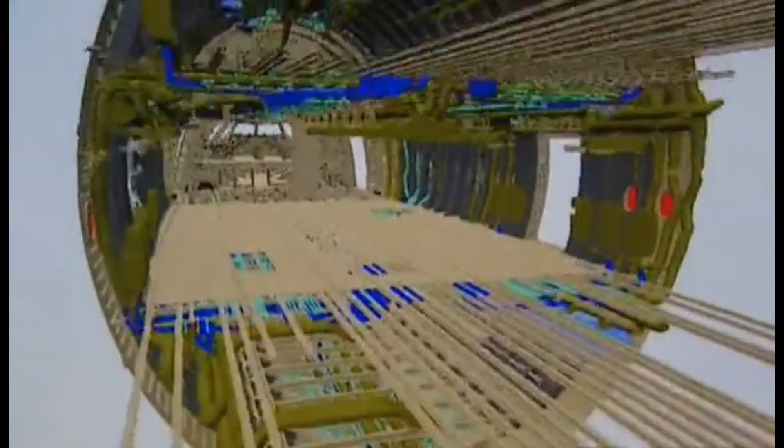European plane maker Airbus is staking everything on a machine that they hope will replace the big Boeing and dominate the market for years to come. By any standards, taking on the 747 is a massive gamble. If they succeed, they'll make a fortune. If they fail, billions will have been thrown away.

This aircraft cannot be a failure. When you invest $10.7 billion on building what we're pronouncing to be the flagship of the 21st century, you can't fail. There isn't a 'well, we almost got there' or 'it's so-so, not too shabby.' No, either it's going to be that flagship of the 21st century, or it's going to be a disaster.

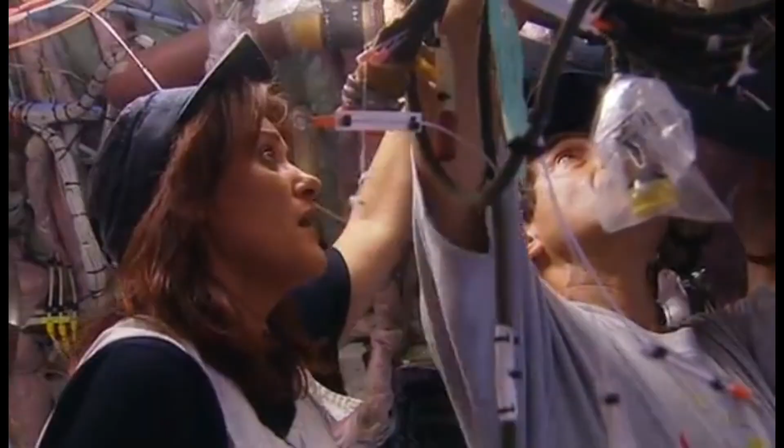Since 2003, Channel 4 have had exclusive inside access to this huge project. From the senior management fighting deadlines and budgets - the people are exhausted already, they are under the highest pressure you can imagine - to the men and women actually building the plane. These moments really piss me off.

It's a tale of the struggle to manufacture giant components all over Europe, and then to ship them to France for final assembly. We are crazy. It's a mammoth high-technology engineering challenge. The race to build, test, and fly the brand new machine.

In charge of it all is 48-year-old Charles Champion, head of the entire project. He understands only too well the risks involved. Well, what is at stake, I would say, with such a program is basically the future of the company, as such. Really? Really.

Airbus was created in the 1960s, when Spain, Britain, France and Germany decided to take on the might of the American aviation industry. Their first aircraft took off in 1972, and nowadays they make over 300 planes a year. But the A380 is on a different scale altogether.

Building such an aircraft, it's a bit like climbing a mountain. You see the mountain in the distance. It looks high, but not too high. And you start walking, and you got the first level, and then you say, 'Whew, this one was hard.' And you got the next one. It's even harder. And so you see the summit. It's getting closer, but at the end of the day, there's still a lot to walk and a lot to climb.

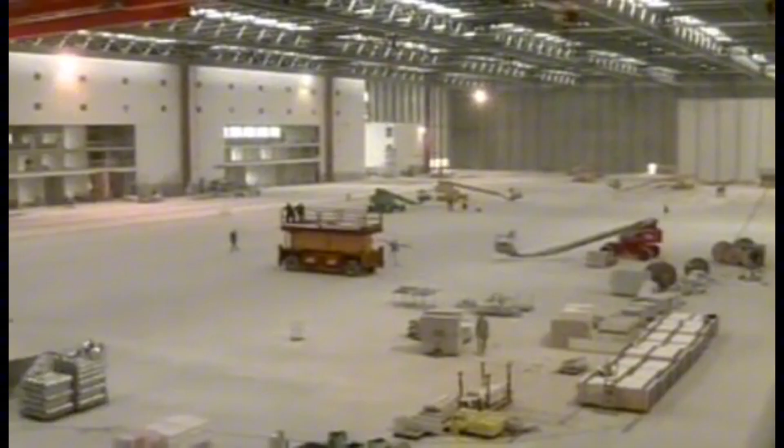December of the year 2000. Now that Airbus have a basic design for their huge new plane, they can start building it, or rather the buildings that will build it. The aircraft is so big that new factories are needed for almost every major component. On top of that, Airbus always share the work between its 4 founding countries, so a major international construction project is required.

The A380 will be built from a giant kit of parts made mainly in Spain, France, the UK and Germany. Each country has had to invest heavily in new facilities. Other parts will come from more than a dozen other countries, so the plane is truly a global effort.

It's big, it's really big. You name it and people are working on it, so at the end of the day it's almost impossible to count the number of people working on this project.

The biggest single development is near Airbus headquarters in Toulouse. The final assembly line is where the various components of the plane will be joined together.

Work began in 2001 on a complex that would cost £240 million on its own. A third of a mile long, it covers 24 acres, big enough to hold 8 planes at once. The huge cost of this programme means Airbus have to sell 250 planes just to break even.

To help the drive for early sales is a nearby showroom. Inside is a full-size demonstrator of the new machine. Getting customers to spend a lot of money on a plane that has yet to fly is quite a challenge.

But Chief Commercial Officer John Leahy is full of confidence. Why would you want to spend $265 million for something like this? Because it'll do something no other airplane in the world can do. And that's bring people 8,000 nautical miles in a level of comfort that's never been provided before.

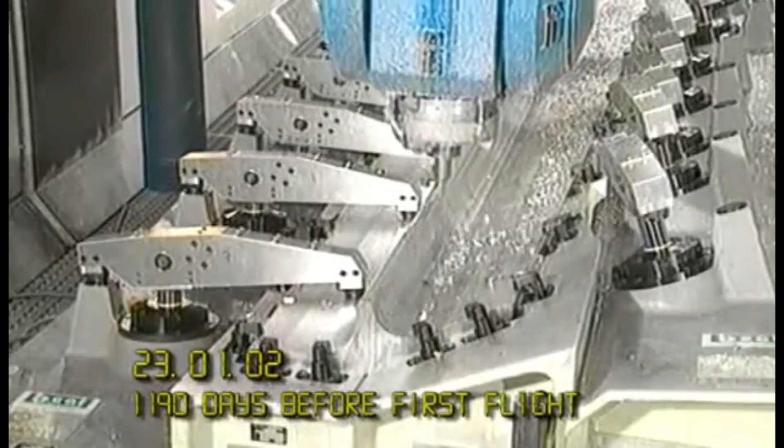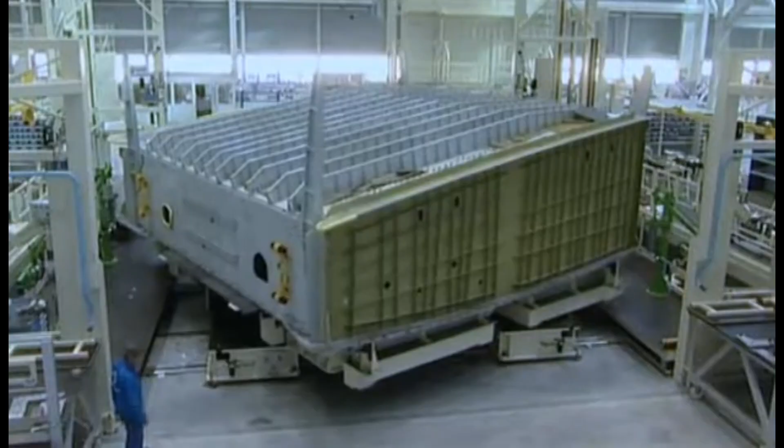The first piece of metal is cut in January 2002, and shortly afterwards, huge components are being produced in brand new factories all over Europe. In Germany, large sections of the fuselage rapidly take shape, put together using high-tech materials and thousands of rivets. In France, the carbon fibre centre wing box, the structural heart of the aircraft, comes together. In the UK, in Broughton, North Wales, the wings themselves are assembled. Built up from hundreds of components, each one is constructed standing on its rear edge. It looks more like the hull of a ship than part of a plane.

By November 2003, the first wing is ready to be hoisted out of its supporting jig, and engineer Simon Shingler and his team will get their first sight of the giant part.

The whole idea of having you all here is to make sure that you're all concentrating on your one specific station, right? That's how we're going to ensure that we take this wing out without anyone hurting themselves or without the components getting damaged. When we're lifting this wing out, make sure all the mobile phones are turned off.

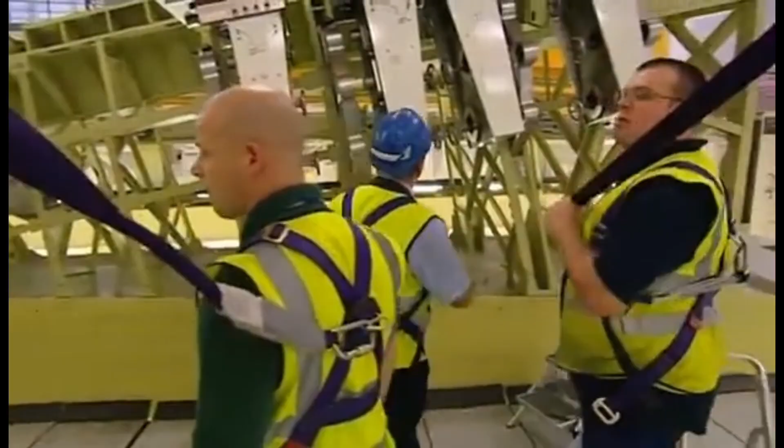Despite the laughter, this is a serious business. The wing weighs over 30 tons, and to damage it now would be disastrous. Everybody gets very excited, and it's easy to leave one of the attachments in place or part of the tooling, because there are so many attachments around the periphery of the wing. If that happens, it causes damage when it's being lifted.

Alan Ferguson is in charge of the first stage, attaching the hoist to the solid titanium lifting points. What we're doing is making sure we get the crane correctly aligned with the lifting attachment, so that when we make the initial lift, we don't get any sway on the wing. So it's critical, yeah.

That's going to be twisted back on like...

Right, we're ready to go. We want everyone in place now, and then we're going for it completely. Right, gather round please, gents. The operations team and the crane driver are going to take some weight. We're going to release the front spar, and then we're going to remove the wing. Try to stay calm, don't panic. We'll do everything nice and slowly, there's no rush now, but once we start, we're not stopping. Thanks very much. Okay. Right.

Steady now. Okay. All right, you're clear, take it off. Right, get that spar support out, please. Is it down? Right. With one small movement, the wing is free. Clear, I think the wingtip's clear. Yeah.

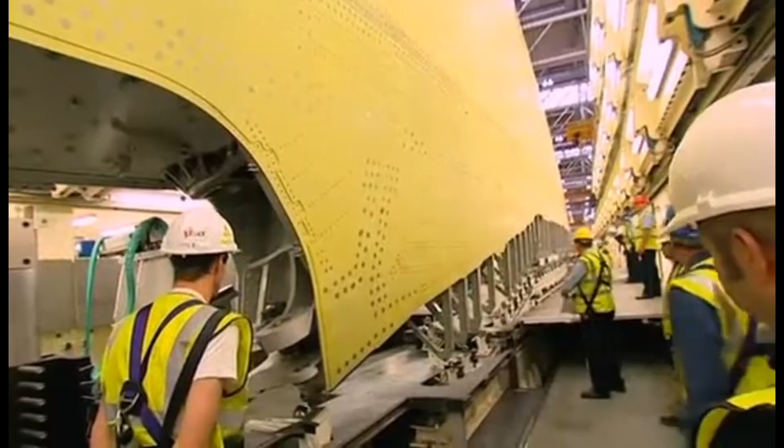Now it can be lifted out and into the next hall. Don't forget the outboard end. The wing may look big now, but once the rest of the parts are fitted, it will grow by half as much again.

The true size of the A380 is starting to show. I think the whole world's going to look on in awe the day it flies. I think the Boeing Aircraft Company have got something to be very wary of.

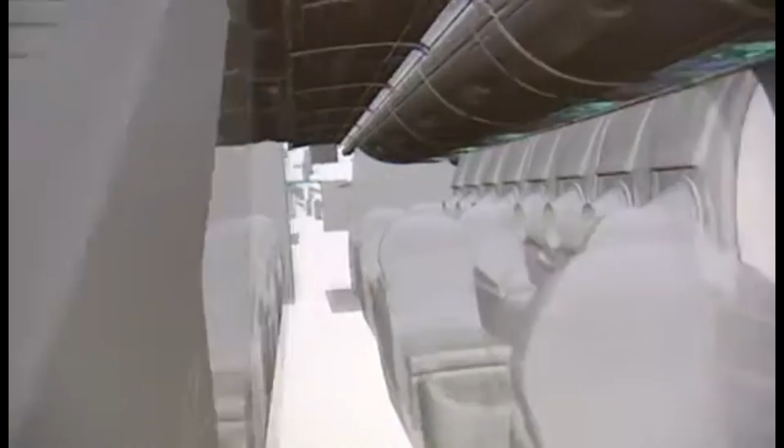But even while the major components are being built, detailed design of the interior and many other parts is far from finished. Charles Champion and his team of senior executives meet once a fortnight in Toulouse to try and keep the project on course.

With so much happening at once, there is a real danger of becoming overloaded. Can we start? It's a question of time management, not only at work, but also time management with your personal life. And you can burn out. Basically, if you're not careful, you just can burn out, and at the end of the day, you're out.

Andreas Fähring has been brought in to replace the previous head of interior engineering. For him, it's particularly tough because he's taking over a department that is already 3 months behind schedule and over budget. Team and myself, we are under enormous pressure because we have to keep the timeline and we are late. We have to keep the budget line and we have major difficulties to do so.

Even at this stage, Andreas and his staff are suffering from the punishing schedule. People are exhausted already. And sometimes they are a little bit overstressed, and the reaction is overstressed as well. Because if you then have a very quick requirement coming in, you have to speed up, and so on. They do not understand, because they are working like hell already.

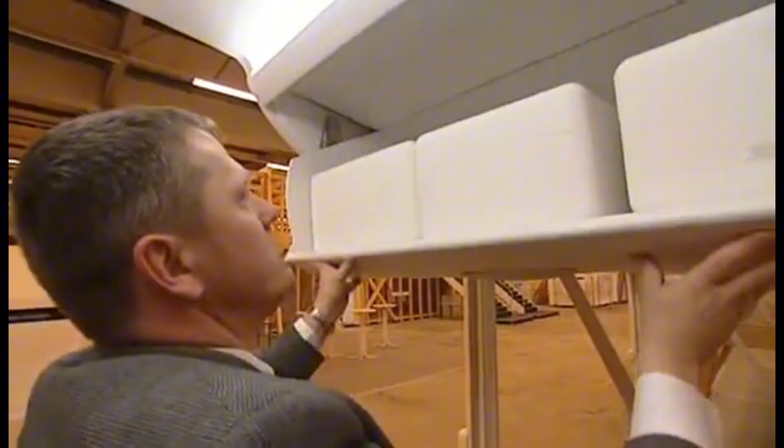Even engineering something as simple as the overhead lockers is a challenge, which is manually operated. The loading limitation of these bins are 50 kilos or 60 kilos. So you can imagine that if you have a stewardess or a passenger trying to move 50 kilos like this, they are not that strong, and it is a difficulty.

Although the cabin doesn't need to be finished for the first flight, building and testing it is a process that will take several years. Even now, if the early customers are to get their planes on time, the team have their work cut out.

What is really needed is time. Time.

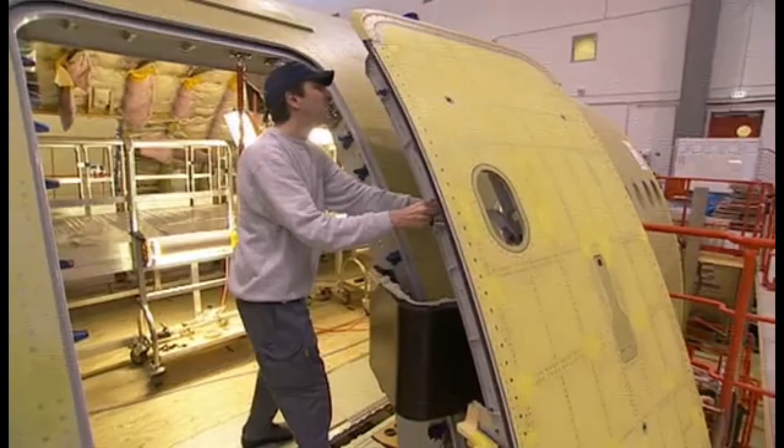By March 2004, the first set of wings are nearing completion in Broughton. The fuselage parts are almost ready to leave northern France and Germany for the final assembly line in Toulouse, where everything will be joined together.

Carrying such large objects thousands of miles is a major task in itself and requires one of the most complicated and expensive transportation systems ever devised. The parts will travel by road, river and the sea in a logistical dance that has to fit together perfectly and work first time.

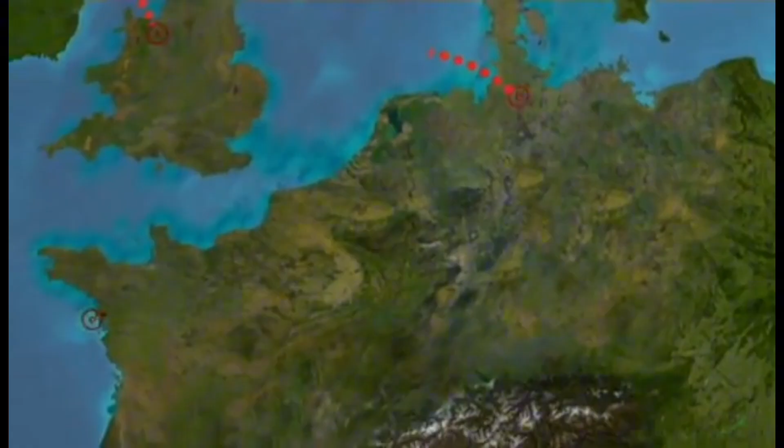The fuselage, wings and tailplanes will be carried by ship from the factories in Germany, Britain, France and Spain, converging on the port of Pauillac near Bordeaux on the west coast of France. From there they'll be loaded onto barges that will carry them 59 miles up the River Garonne.

But still the journey isn't over. A fleet of lorries will haul the parts by road the last 152 miles to the brand new factory in Toulouse.

It's a highly complex scheme that's never been attempted before, and it starts in Hamburg on the 24th of March 2004 as the first finished fuselage sections of the giant airliner emerge into the light of day.

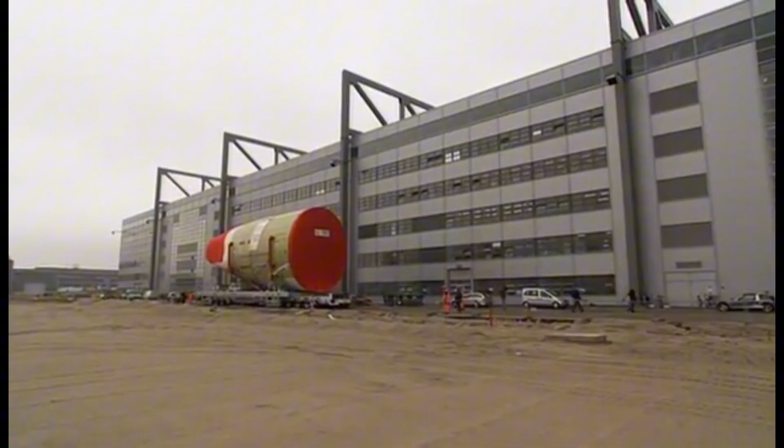The parts are carried on purpose-built radio-controlled, self-powered low loaders. Each one has 96 wheels and can travel at a maximum speed of 6 miles per hour. The factory is just a few hundred yards from the purpose-built dock where the cargo ship waits.

Now begins a 970-mile voyage through some of the busiest shipping lanes in the world to the west coast of France. Thankfully, the weather is perfect.

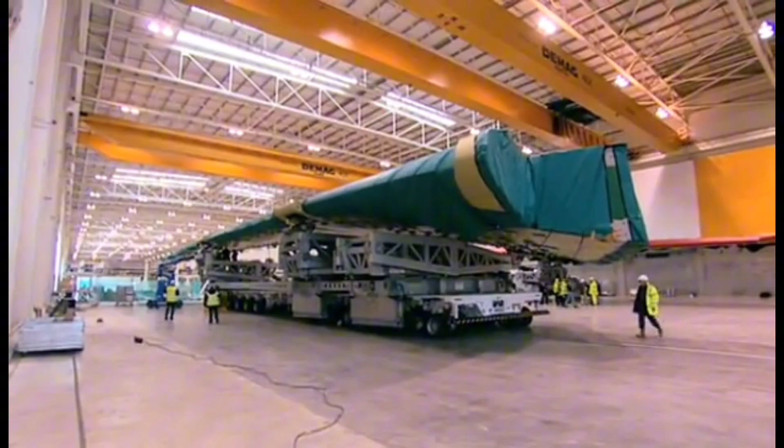In Britain, a few days later, the wings begin their journey. For the UK team, it's a significant day. After the last 2 months of preparation, the previous 2 years of planning, we've actually got the moment now when the wing's going. So it's an exciting time, and it's what people here have looked for many, many months.

Stage 1 of this 1,000-mile trip is to use another low loader to carry the wing a mile from the factory to the nearby River Dee, where a barge is waiting. On the way is a narrow bridge, and there'll be just inches to spare.

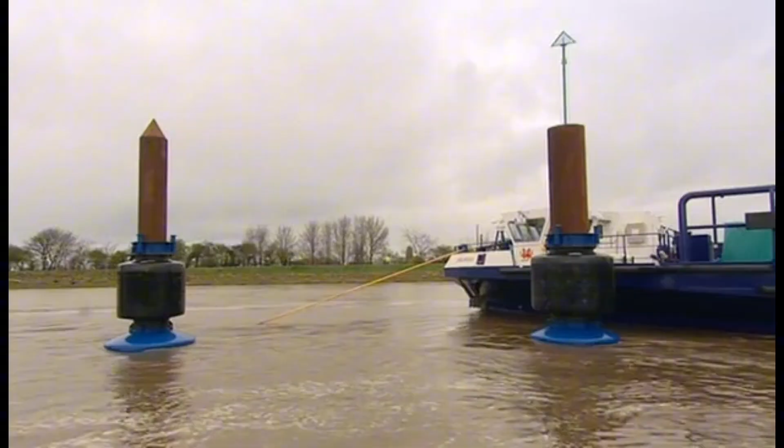At this time of the month, the current is running dangerously fast. They haven't picked the right time for us because the tide is making probably about 5 knots, and we've got to compete with that later on. So not the best time of year, not the best tide for the first time it's been done, but I'm sure we'll manage it. We'll have to.

The wing is gently manoeuvred onto the barge and the low loader carefully retracted. It's time to put all the theory into practice.

The crew are constantly monitoring the clearance under the bridge, but as they approach, they realise the strong wind is holding the tide back.

They might hit the bridge too soon, so Graham holds off for a few more seconds. Yeah, there it is. Okay. Just hope it's taller than they say it is. Look now. Hey, I tell you what, that is nice, that is beautiful. Isn't that beautiful? Exactly 50 centimetres. Exactly.

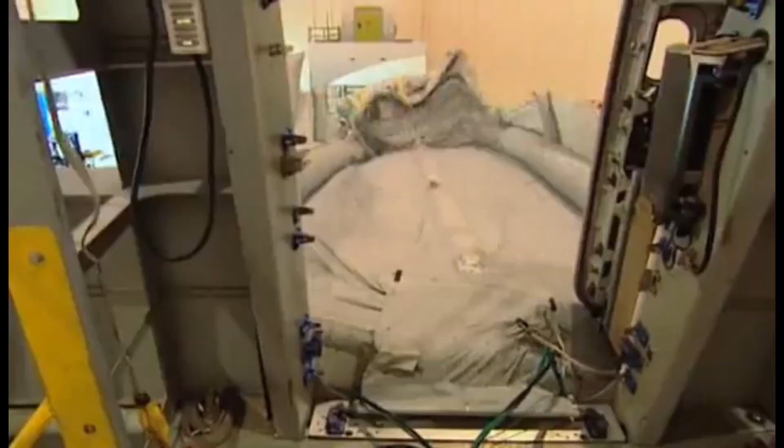Each slide is designed on computer, and this is one of the most complex on the whole plane, the over-wing slide. Today it will be tested for real, a critical time for the engineers. This is a brand new slide, fresh out of our prototype department. It's never been deployed, it's never been slid on, and the pressure is on.

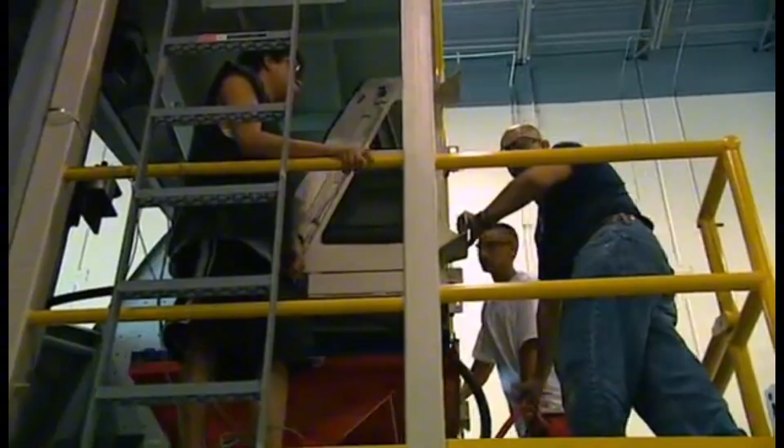The slide fits in a small pack, which is mounted to a full-size mock-up of the plane. It allows passengers to get from a door, across the wing, to the ground, deploying almost as if by magic. 3, 2, 1!

The regulations say that 850 passengers must be able to get out of the A380 in just 90 seconds, and the only way to prove the slide is up to the job is to use real human beings. 40 people will take part in the test, and the first step is to get everybody warmed up.

Everybody does it! Let's go! Let's do it! Come on!

Ted Oney, who'll be running the test, is wearing a rather special shirt. This is my lucky Hawaiian shirt, of course. Every time I want to run an evac, I wear this shirt, so when people in the plant see me in this shirt, they know we're running an evacuation test.

The aim of the test is to show the slide can hold up to the weight of the evacuees and allow a safe but speedy exit in an emergency. Our slide will have to have 40 people traverse down the slide in less than 17 seconds. That meets our specified rate. So in the grand scheme of things, we'll be able to say that we could evacuate the entire airplane within 90 seconds.

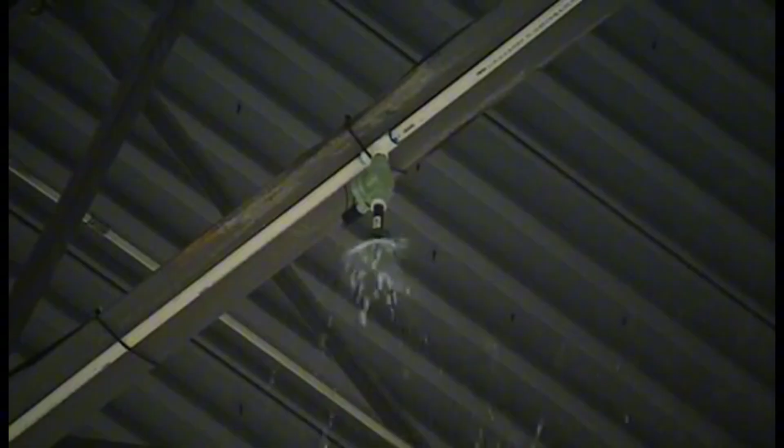As the water puddles on the floor at the toe end of the slide here, it means the landing surface is slick. People are used to landing normally, and suddenly it's much more slippery, and if we don't do our job right, we get a pile of bodies at the bottom.

Go, go, go, go, go, go, go, go, go! Get out, get out, get out, get out, get out, get out, go, go, go, go, go, go, go, go, go, go, go, go!

Come on, come on, come on, come on! Yeah! All right! All right, yeah! All right, have a seat, have a seat. Great job, everybody, great job! I'm not doing that no more. No way, I quit.

Excellent, excellent evacuation, I'm very pleased. Yes, I'm happy with that. There wasn't a lot of bumping. The slide did well. One slide tested, just 15 more to go.

By the 7th of April 2004, thanks to careful planning and good weather, 3 huge pieces of fuselage are nearly at the factory where they'll be joined together. All the components made it safely to Pauillac, up the River Garonne and past the city of Bordeaux.

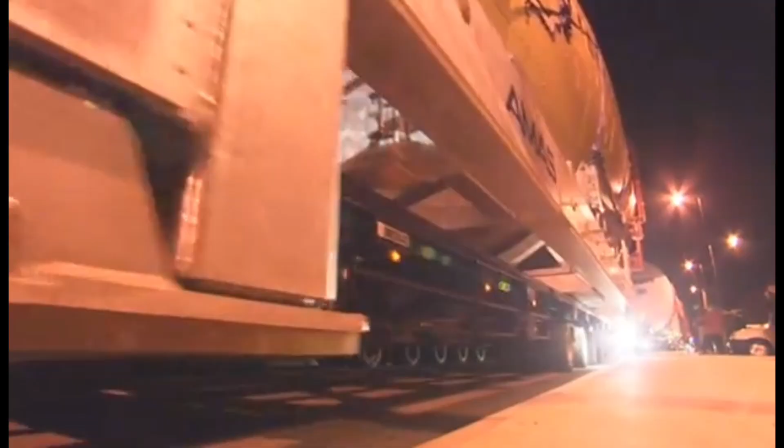This is no one-off event. When the plane hits full production, these convoys will be passing through once a week.

With Levignac successfully navigated, the last 11 miles are relatively easy. At last, after travelling by ship, barge and lorry, the lights of the final assembly line are in sight. Although it's nearly 3 o'clock in the morning, there are several hundred people waiting outside the massive new factory. Among them is Charles Champion, here to witness a significant step forward.

The delivery papers are signed, and now Charles and his team are ready to tackle the next phase of this enormous project.

For some people it's like a relief because they've delivered the final assembly line, they've done the factory, they've demonstrated the transport system. But for us guys, we are looking at the next steps: integration, first flight, then flight test phase, and then deliveries to the customers.

The work has only just begun.

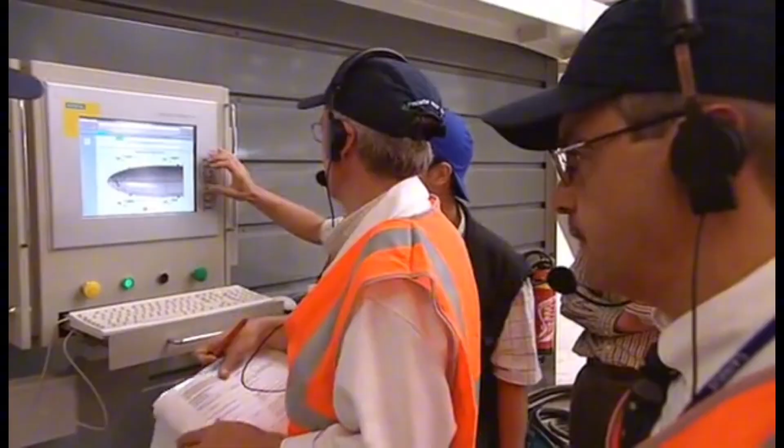Ensuring that the 3 body sections of this 73-metre giant are brought together in a perfectly straight line requires massive tools, the latest technology, and lots of patience. I feel very confident now, even if it's difficult, because we have put in place very accurate systems.

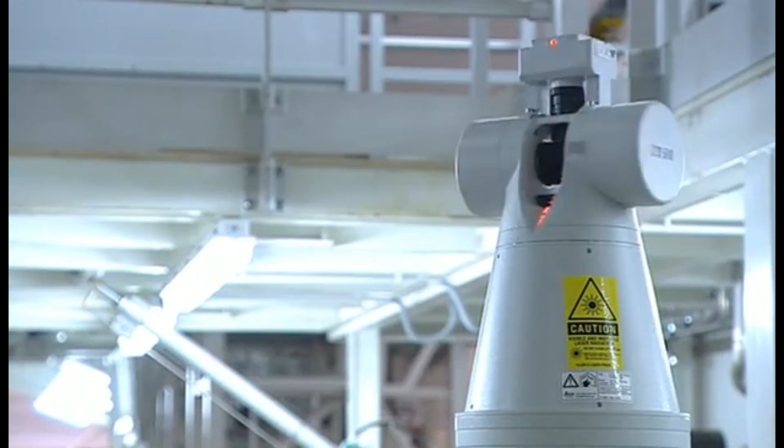The key to success lies in the use of lasers. Invisible beams scan the sections of the fuselage, and the light is reflected by mirrors mounted on the approaching components. From these reflections, a computer can work out the exact relative positions of the parts, ensuring perfect alignment.

Once positioned, the fuselage shells are brought together very, very slowly. Each turn on the dial brings the massive parts a millimetre closer together.

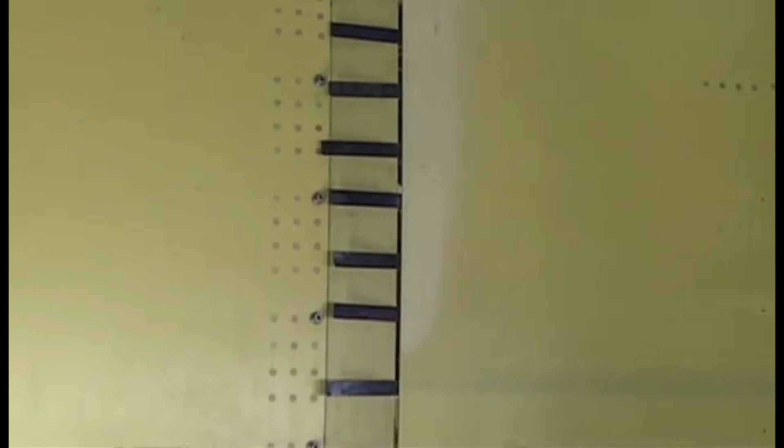On the left, a part made in Germany. On the right, one made in France. The last stage of their 1,200-mile journey. The clearance is so tight, metal shoehorns are needed to ease one shell over the other. But it's a perfect fit, the final joining together of an elaborate European jigsaw puzzle.

Soon the sales team will have a real plane to show to their customers. But the question is, will the airlines like it?

It's now the 23rd of July 2004, and for Chief Commercial Officer John Leahy, the pressure is mounting. Leahy needs 250 firm orders for the project to break even. So far, he has 139.

Today, Qantas Airways, who have ordered no less than 12 aircraft purely on the strength of Airbus's promises, are coming for a tour to see if they've spent their £1.8 billion wisely.

We're going to go out and greet them? Okay, well, where's Chris? Are they going to get about a 10-minute warning or something on the bus?

It has to go smoothly. This is one of our best customers, one of our bigger customers now for the A380 program, and we want to make sure that they're happy, that they get the answers from us that they want, and they go away with a good impression. You can imagine what would happen if they came here and said, 'Oh my heavens, the A380 isn't what we thought it would be.' In front of their entire board, that could be devastating.

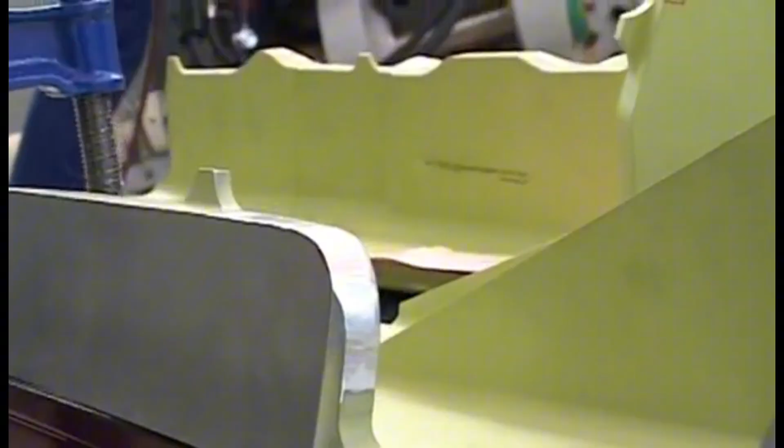Once again, accuracy is vital. The slightest error in the angle at which the wing meets the fuselage could have a drastic effect on the handling of the plane, and critically, its fuel economy. With so many sales resting on the performance of this machine, it's a job that cannot be rushed.

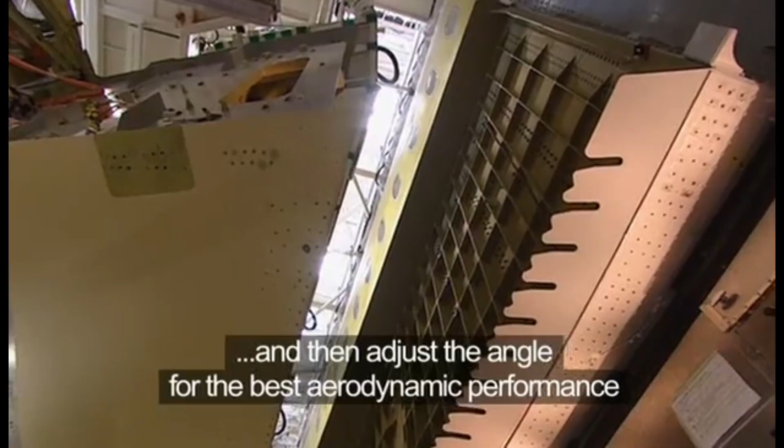Again, the laser positioning system ensures the wing is in the right place and at the right angle. But after a whole day of careful work, another small problem appears.

Some large bolts have been left attached to the wing. We must remove this one to finish the junction of the wing. A quick phone call to check that it's okay to remove them, and now the wing can be safely joined to the fuselage.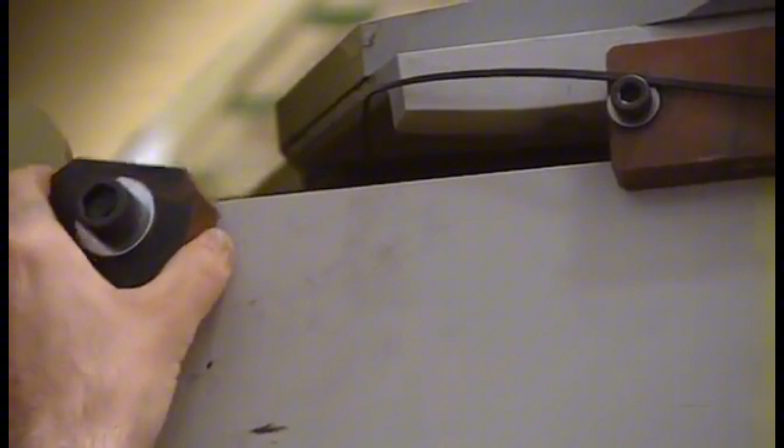A couple of miles away, at the perfectly manicured Airbus headquarters, John Leahy is conducting his guided tour for Qantas. They have arrived at the Airbus showroom, where they'll see a new, far more realistic interior.

Okay, now I think we've got just about everybody. Okay, now Rod. Though it's all smiles, this is deadly serious. If they don't like it, there'll be trouble ahead.

It's almost like a young family introducing their new baby to the relatives. You want everybody to be impressed. You want everybody to say it's beautiful. And deep down inside, you're really waiting to see what they truly do say.

The head of the airline is Geoff Dixon, a tough-talking, no-nonsense businessman. To begin with, he doesn't seem too impressed.

Notice the headroom. This is coming out about standard size.

John presses on with the walkabout, and then, almost in a whisper, Geoff reveals his true feelings. But just to give an idea of the space that you've got - it's true, and that's the way the liners are. Oh, it's fabulous. Better than we expected when we ordered, but we did expect a lot, so yeah, right up to expectations.

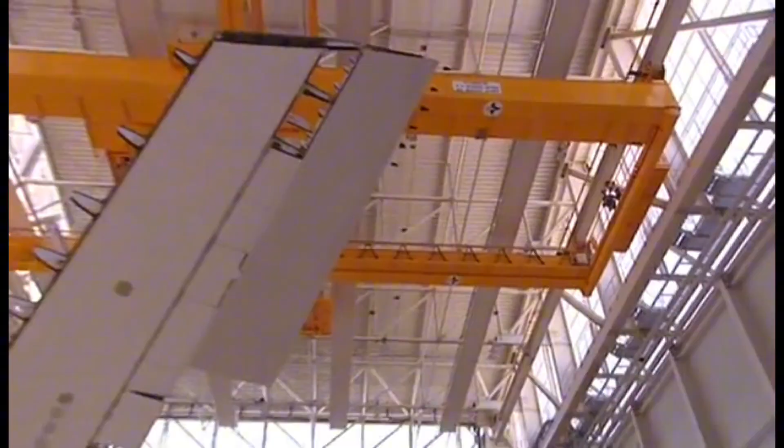By mid-June 2004, major structural assembly of the biggest airliner in history is well underway. This is the horizontal tailplane. With a span of 32 metres, it's as big as the wings of a small airliner. Made of carbon fibre in south and central Spain, it's easily the biggest tailplane ever made.

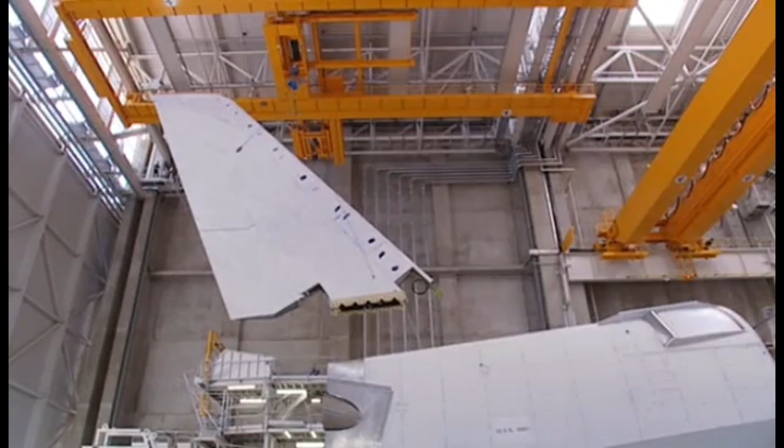The tail fin is another carbon fibre monster. 14 metres high, this component is made near Hamburg in Germany. When installed, it will stand as high as an 8-storey building. Some airports will have to buy new cranes to service it. Carefully, it's craned into place and attached with 24 titanium bolts.

As the last piece is attached, Charles Champion comes to check on the plane, and Gilles Cormier has bad news for the boss.

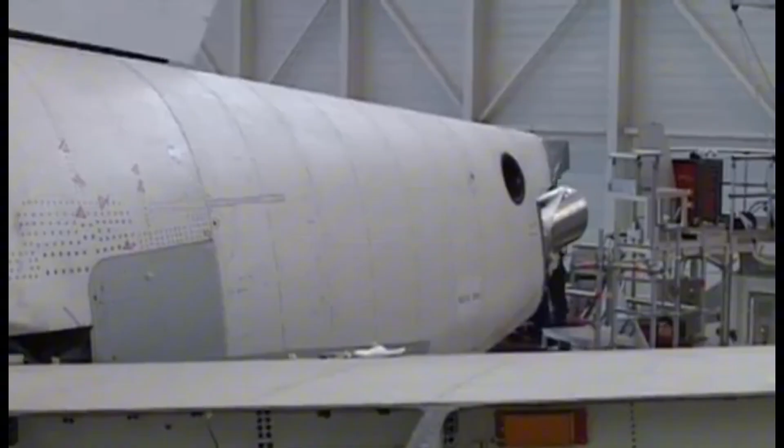6 millimetres might not seem very much, but the problem will take 3 days to sort out. Time they really don't have.

I think it's one of those phases where the success of the project is within reach, but you have many elements to tackle in parallel in order to make it happen. So you're under control, but you've got to work fast on several parallel subjects in order to be able to deliver the project at the end.

The next stage is to install the landing gear. These substantial parts have to be extremely strong. Not only is the A380 the heaviest passenger plane ever built, its landing gear must be able to cope with extreme situations.

Many landing gear engineers have a copy of this low-resolution video clip as a reminder of the conditions that can occur. Heading for the now disused Kai Tak Airport in Hong Kong is a Boeing 747. Approaching in a crosswind, the left-hand gear is about to take the full weight of the plane as it hits the tarmac. Amazingly, this was a successful landing, and the A380 will need gear that's stronger still.

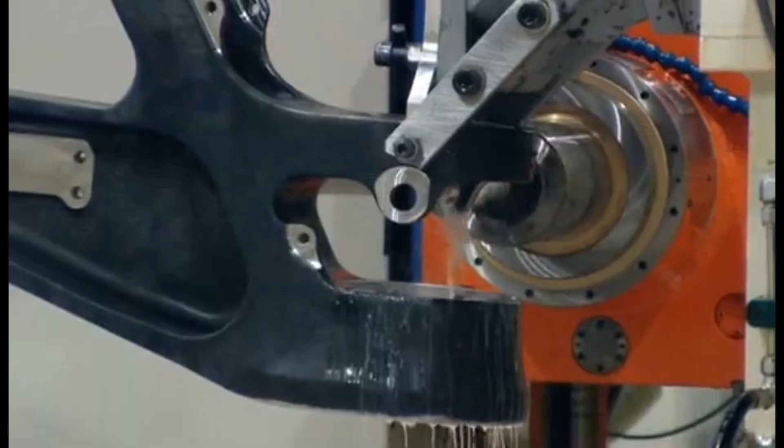The 747's gear is made by Goodrich, who are also supplying the main gear for the A380. Here, near Toronto in Canada, production is well underway, and testing is just about to begin.

When we have a new landing gear program, we have a lot of tests that we need to do: strength, performance, dynamics, durability. This one is a performance test. It's one of the first tests we do, and one of the more important tests. It's called a drop test. What it is, is a simulation of landing.

So when an A380 lands, you've got 560 tons of aircraft moving slowly towards the ground, as well as 200 miles an hour down the runway. When the aircraft hits the ground, something has got to absorb that energy. So if you jump off a chair and land, your knees have to bend and give a little bit.

Even just with the weight of a person, you're going to damage yourself if nothing gives. So that giving of your knees, your legs are absorbing energy. That's what the landing gear has to do, but instead of 180 pounds, it's got to do it for 560 tons.

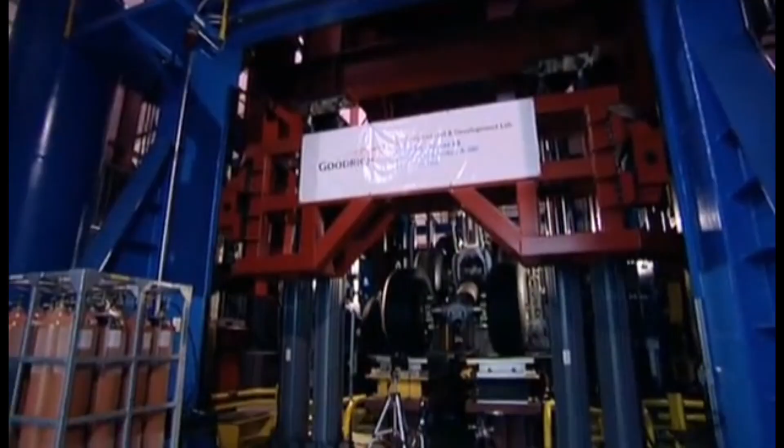Suspended inside this huge tower, the landing gear is raised in preparation for the drop. The rig is static, so to simulate the approaching ground speed, smaller wheels driven by powerful electric motors spin the big 55-inch tyres in the reverse direction.

When a switch is flicked in the control room, a hook at the top of the tower will release, allowing the gear to fall. It must absorb the same energy as a 100-mile-an-hour car crash without being damaged. It's a critical phase in the whole programme.

This could be a make or break test. If the performance of the landing gear isn't what we predicted it to be, it could impact the schedule for the first flight. So it's essential that the gear performs to how we predicted it, and from these tests, we'll be able to tell whether it does.

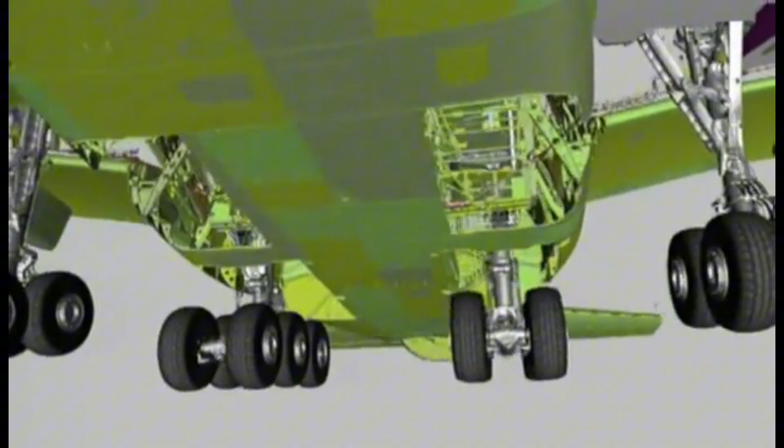Although it's huge, the size of the A380 means that this 6.5-ton component is just one part of the plane's undercarriage. In total, there will be 2 6-wheel units under the body, plus 2 4-wheel units under the wings, and a 2-wheeled set in the nose. So what you're about to see is only a fraction of the energy involved when the vast airliner touches down.

Early data shows that although there was an unwanted shudder as the wheels came to a halt, the landing gear shrugged off the huge impact with ease.

It's now only 9 months to the first test flight. In Toulouse, the tail cone has finally been fixed, and the A380 is at last ready to move to the next stage of assembly. For Gilles Cormier, it's a relief.

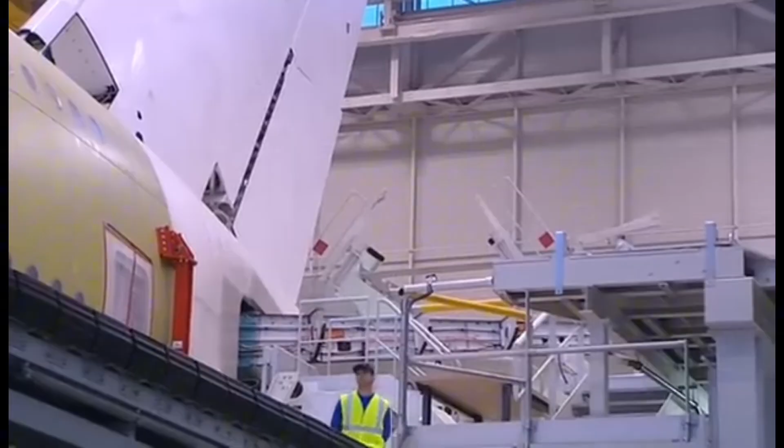The man in charge of this tricky phase is fully aware there's an awful lot of work to be done by the end of October. It's a very difficult challenge, because it's a prototype, so it's very difficult to meet our deadline.

August is fast approaching, the traditional holiday month in France when most of the country shuts down. For Airbus engineers, this year there will be no holiday. My family are very aware of this personal challenge, so everybody in the family is okay to say, okay, this year it's the aircraft year.

The plane is lifted on huge jacks, and teams of technicians begin work. The next milestone is when the aircraft will be revealed to the world, just 196 days from now. Attending will be VIPs, 5,000 guests and the world's media, with the pictures beamed by satellite all over the world.

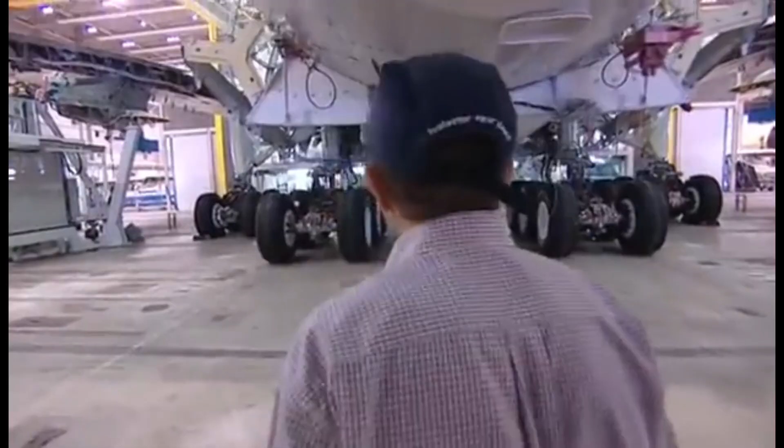But for now, one 55-year-old man has a rather special interest in the new machine. Jacques Rosay will be the first person in the world to fly the plane. Seeing it for the first time, his reaction is not exactly what you'd expect. Generally speaking, no, it's an aircraft, larger than the one we have already, but...

I think I feel very, very confident. He's confident because although the plane is still far from finished, he and his team have already spent thousands of hours flying it.

These flight simulators hold the heart and soul of the new plane, already living and already being tested. The state-of-the-art computerized flight control system means that the plane can be made to handle almost any way the development team chooses.

You don't realize that you fly such a big aircraft. You fly it like you fly a little aircraft. It's incredible. It's very, very easy to fly, like a bicycle. It's a kind of large bicycle, if you like.

The simulator is so advanced that today they are testing a scenario that is only likely to occur once in over 1,000 years of flying. 3, 2, 1, now. The wings are covered in ice, 2 of the engines have failed, and half of the flight computers have gone offline.

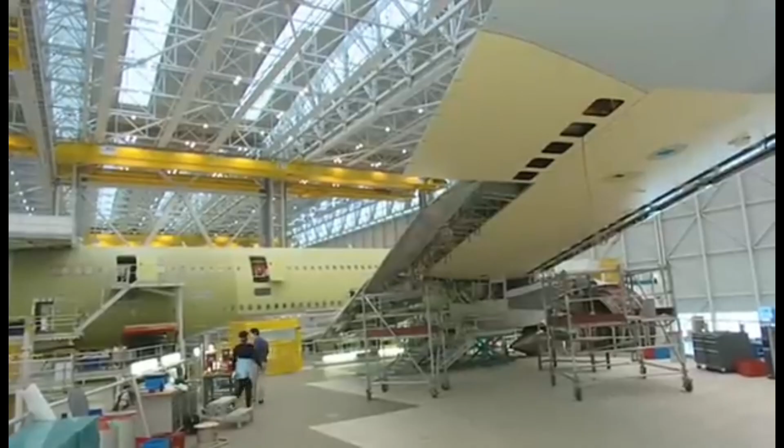Can the plane still be controlled? Piece of cake. The technology that makes the plane so safe is also extremely complex.

And when battling against a deadline, complexity eats valuable time. The schedule is slipping.

Getting the airplane out on time is critically important. There are significant penalties that we would have to pay to each customer if we delay his aircraft after a certain grace period - I don't want to say how long - but a certain grace period involved in every contract.

We can't relax. We have no right, we have no time to relax. So every hour, every minute we are there on the workshop, our main job is to receive pressure and to transmit pressure. And it's a nightmare.

The penalties for late delivery run to hundreds of thousands of pounds a week. And that pressure runs down the chain of command, all the way to the men and women building the machine. Some people could, how do you say, break down, no?

Christian Polite is the engineer in charge of the tail fin, known as the vertical tailplane or the VTP. Building this huge part has not gone smoothly, but finally it's time to install the last piece, a camera that gives the pilot a bird's eye view from the very top of the fin, some 23 meters up.

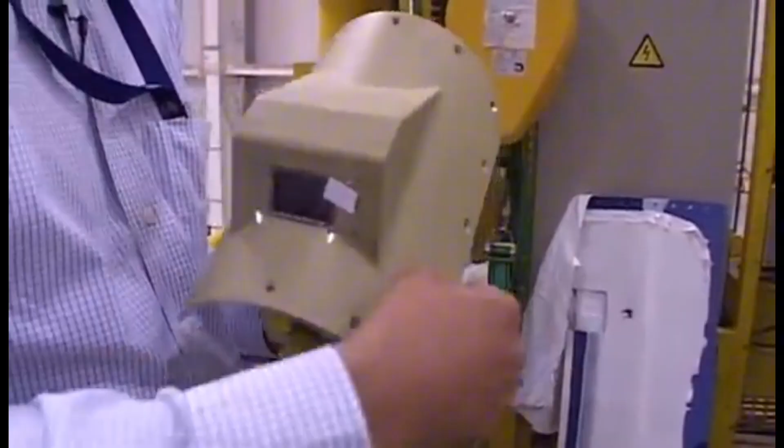Right now we're going up to almost the very top of the vertical tailplane in order to install the last component which remains on the VTP. You can easily see that this part is only screwed to the structure by, I guess, 20 screws around, and it has to be connected to the electric system via these 2 little connectors. The signals are transferred via a fiber optical cable down to a monitor in the cockpit.

Here at the Airbus factory in Stade, Germany, back in February 2004, Christian oversaw the final construction of the largest carbon fibre fin ever conceived.

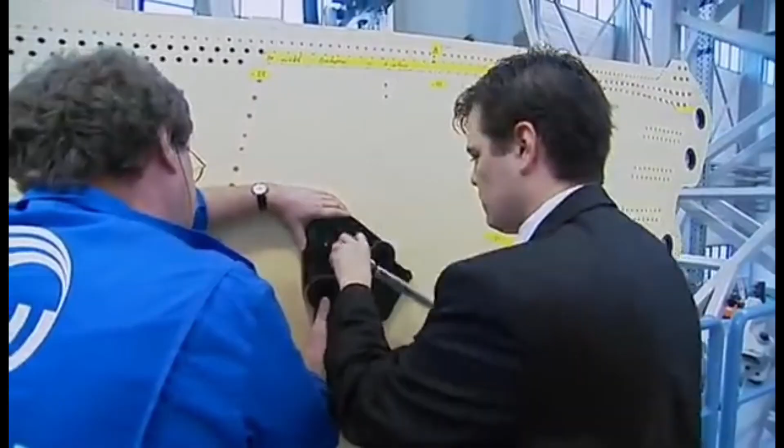The ambitious scale of the production process meant there were always going to be problems. We started with a schedule which allowed us to assemble the first fin within a reasonable time, but in fact we encountered problems which delayed the assembly, and to worsen the situation, the lead time was shortened. So we ended up with a lead time nearly half of the original lead time we planned.

The fin was delivered on time, but it wasn't completely finished. Christian has had to move to France to continue the work. We came here and thought we have a good planning, we have a good time schedule, we have everything on hand, but it wasn't like that. The moment we started working, we had to change each and every point. The planning was upside down, and so we had to start to work. That's the way you find the way through the jungle.

Now though, as the screws go in on the camera, the end is in sight. It's a good sound. That means the screw is in. With every screw we're a little step towards the end.

But then there's a problem.

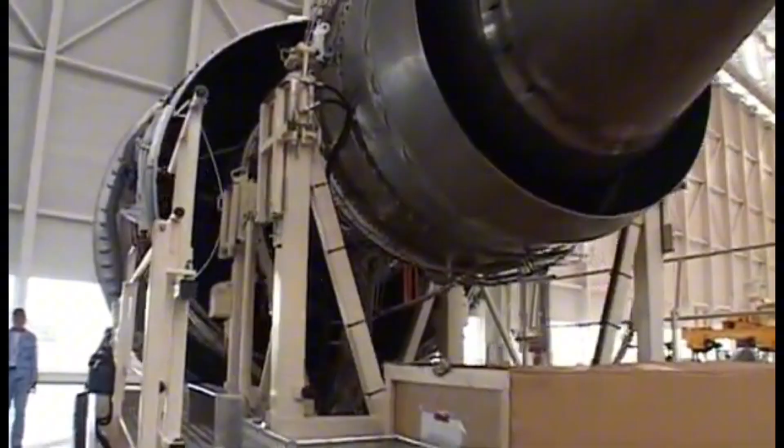Despite the setbacks, the build must continue as fast as possible. Now they can begin mounting the engines, some of the most expensive parts of the whole aircraft. Together, 4 of these giant Rolls-Royce Trent 900s cost nearly £36 million, a quarter of the cost of the plane.

Back in May 2004, the engine flew for the first time, bolted onto a much smaller airliner, dwarfing its other engines. Weighing over 6 tons, the Trent 900 can produce up to 35 tons of thrust at full power, burning a gallon of fuel every 4 seconds. These early tests proved the engine at altitude, but there's a much, much tougher test to come.

Here in Hucknall, Nottinghamshire, a second test engine will soon be a smoking ruin, deliberately destroyed as part of a dramatic yet vital safety test.

It's an important time for the entire project, and as engineer Hilary Barton travels to the test, she admits to some nerves. 'I must admit, I've got a few butterflies at the moment, but basically everybody's done the preparation and it's just now a matter of getting on and doing the test. Obviously before the engine starts, you're sitting there just kind of hoping it all goes well, but just really waiting for it to happen now.'

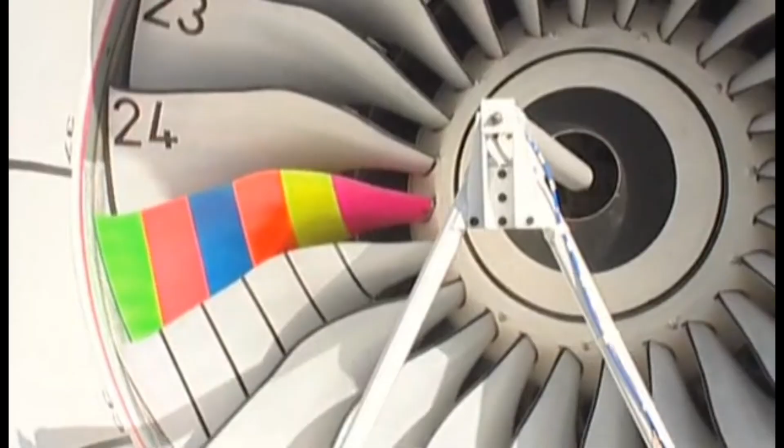Every few years, a fan blade will break in a jet engine somewhere in the world, a rare but violent event that must not put lives in danger. At the root of the coloured blade is an explosive charge. With the engine at full power, it will be detonated, releasing the blade with tremendous force. Whatever happens, no large debris can be allowed to burst out of the engine casing, or it could do serious damage to the rest of the aircraft.

From the safety of a room 200 metres away, watching on video, 25 key personnel are waiting. In the split second the blade is released, the casing must successfully contain an enormous impact.

It is a very violent test. This thing is spinning around at full power, so the forces on the blade are quite significant. It's like having a locomotive hanging on that blade, so you're actually having to contain the energy of that system. There's a lot of energy involved in the design and containment of the blade.

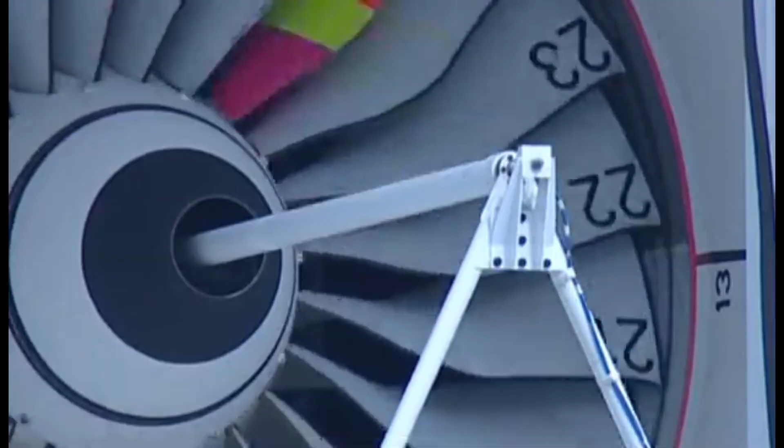The engine is run for 5 minutes so final checks can be made. With such an expensive test, nothing can be allowed to go wrong. High-speed film cameras are used to analyse the action, and at last the throttles are opened and the engine brought to its full, awesome power.

This is what it feels like to be inside a building 200 metres away from a £9 million blade-off event.

Blade-off testing is normally top secret, but for the first time, Rolls-Royce have released this footage. Although the engine was totally destroyed, the fan case did its job, and no large lumps of metal were ejected.

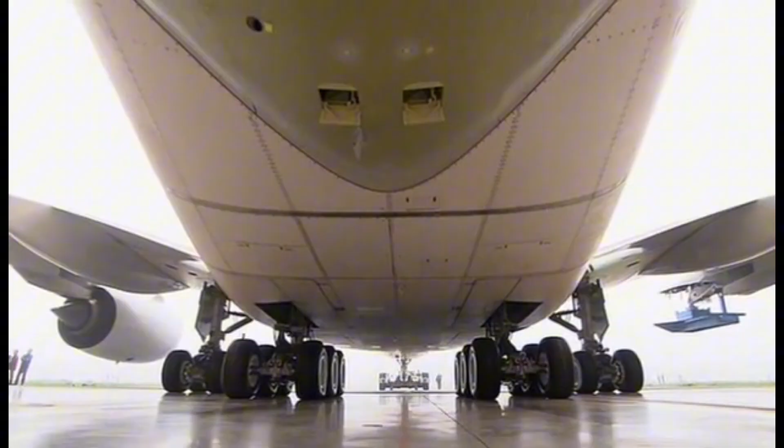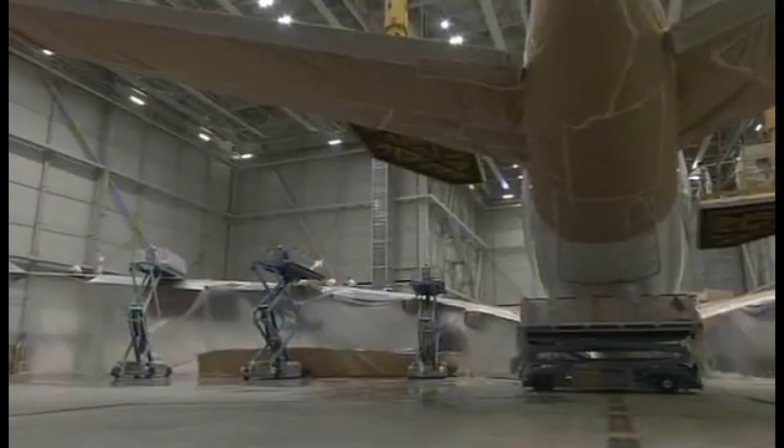With the grand unveiling just five weeks away, the next giant task is to paint the massive machine. In yet another vast hangar, working over the holidays, 90 painters descend on the plane. First, they rub down over 10,000 square metres of bodywork. Then, after applying a very large amount of brown paper, the A380 is ready for a brand new paint job. All in all, more than half a tonne of paint and primer are needed to protect the aluminium skin from the elements.

The final livery has been a closely guarded secret until January the 18th, when the A380 goes public for the first time. The world's press are here, and as ever with this plane, it's a big deal.

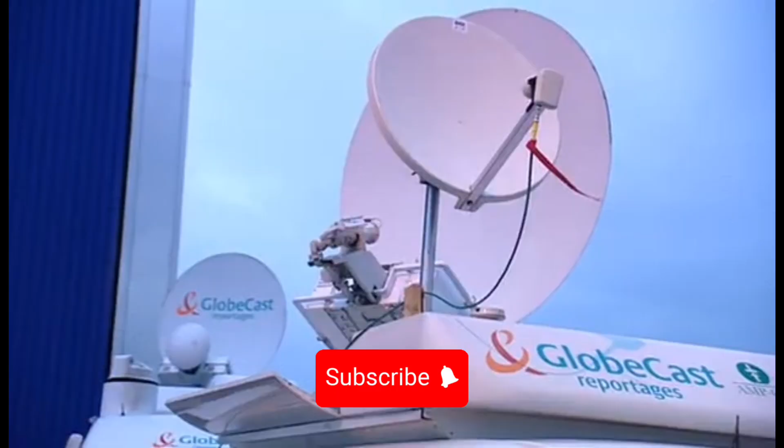Inside part of the final assembly line, seating for 5,000 guests has been installed. In the equipping hall, now full of part-built planes, TV reporters are hard at work, feeding the story to the networks. Richard Branson has grabbed the headlines with news of double beds and casinos in his planes.

For John Leahy and many others, it's a welcome moment of satisfaction. It took an awful long time to get here, didn't it? But now we're here. It's pretty exciting.

The heads of state and governments arrive and take their places for a spectacle featuring dry ice, flying machines and computer graphics. Despite several high-profile speakers, there's only one star of this show. Finally, the biggest airliner of all time is there for all to see. For Charles Champion and everyone else who built the plane, it's a moment to savour.

Well, it's a good achievement, huh? I mean, a good show and good speeches and a nice aircraft. And tomorrow back to work to make it fly. No, it's good. It's good.

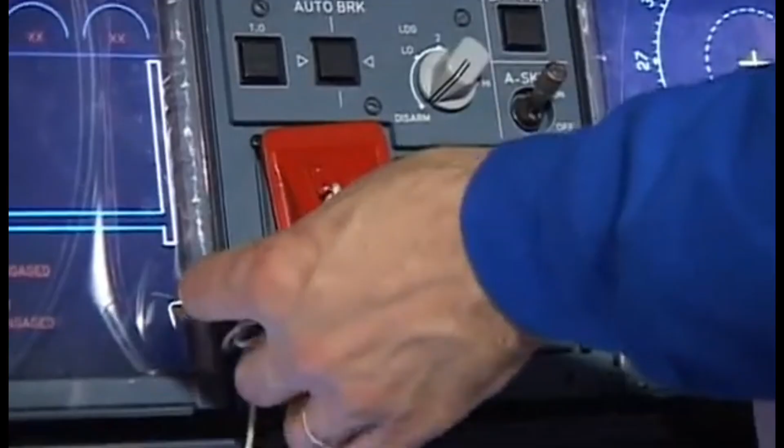Altogether, the gear weighs the same as 20 family cars and must be lifted into the belly of the plane in just 13 seconds.

Getting the system operational has taken months of hard work, but now it looks as if they're finally making progress.

The last few months have been very frustrating because we've had a lot of technical difficulties with systems on the aircraft. We've had a lot of problems during testing, so we've all been working very, very hard in order to have all of our systems working for first flight.

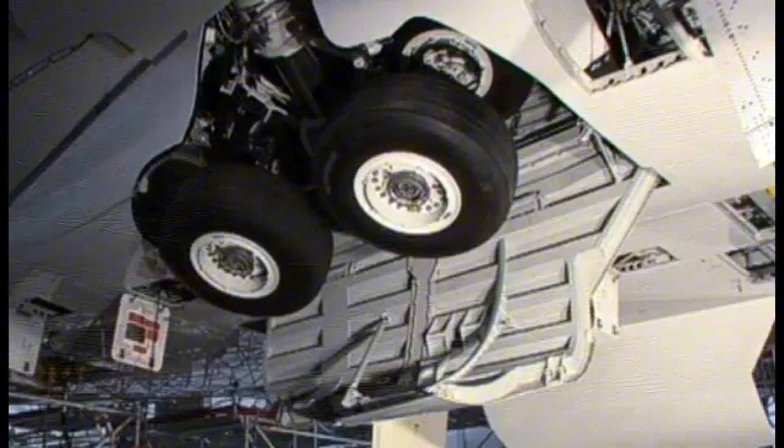So that's system one, looking good. This is why we're here. Days like today is why you do this job, because it's very exciting to see the gears moving, and you spend an awful lot of time making sure that the right parts are where they should be, and so I've been waiting for this for months.

Their last hurdle is to simulate a worst-case scenario. Even if all power was lost during flight, the pilots must still be able to lower the wheels to land. In such an emergency, the gear should fall down under its own weight. But testing it is risky because the wheels will hit the doors as they drop, and that could cause damage.

So this is the big test, yeah. The outer doors begin to open under their own weight. Any second now, the locks that hold the gear up will release.

Immediately it's clear that something has gone wrong. Next, the massive six-wheeled main gears deploy. And after a delay of 16 seconds, the jammed outer wheels slip free. It's not a good result.

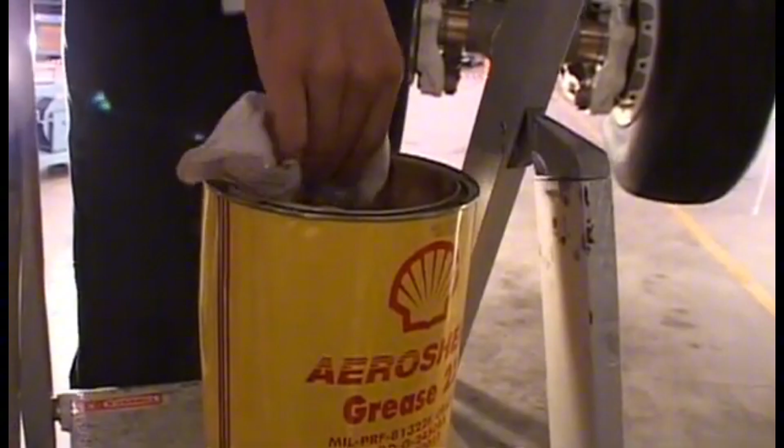The team suspect that the wheel might be sticking on a guide ramp, an aluminium plate where the wheel is supposed to push the door aside. Smearing it with grease should prove if this is quite literally the sticking point.

The ramp does seem to be the problem. A permanent solution is needed, and fast. Finding answers to sticky problems is all part of the business.

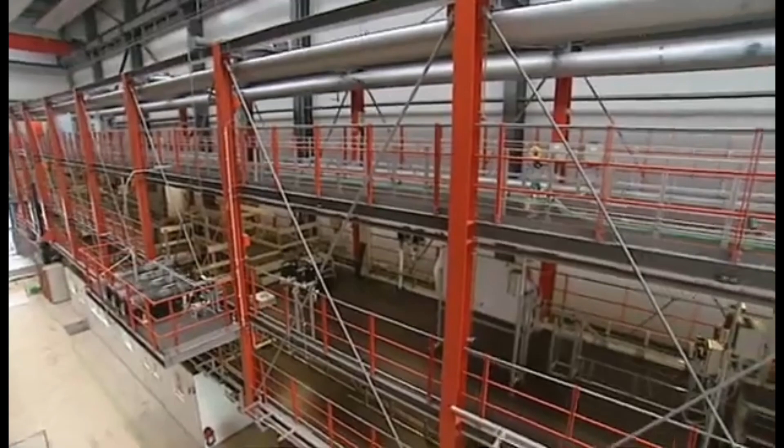Over in Hamburg, Airbus have been straining to ensure another important system works perfectly. Laid out in this building is a full-size test rig of the waste system for the A380. With up to 20 toilets and around 900 metres of piping, it's a big job. Senel Myrtle and Dennis Kaiser have been hard at work for the last 2 years.

We will give you a short demonstration of a toilet flush on the A380. So at first we have to evacuate the toilet system. I can start this, it will get a little bit loud.

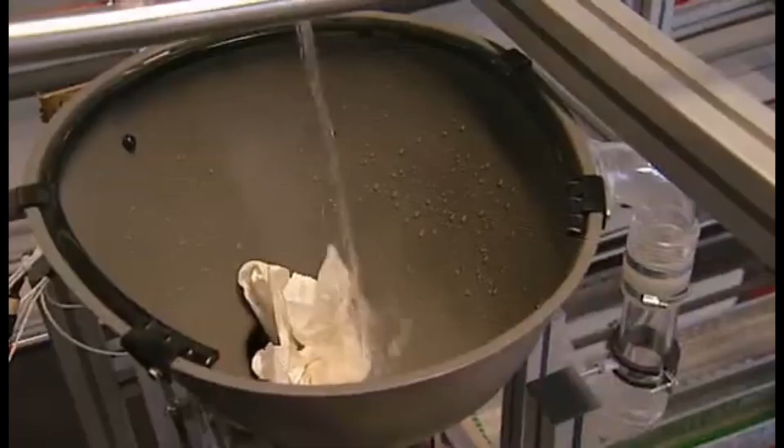The toilets work by pumping air out of waste tanks in the rear of the plane, causing a partial vacuum. When a toilet is flushed, air is sucked in to fill the vacuum, and the waste is drawn down the pipes into the tanks. In the finished aircraft, these parts are made of titanium to save weight, but here Perspex is used for clarity.

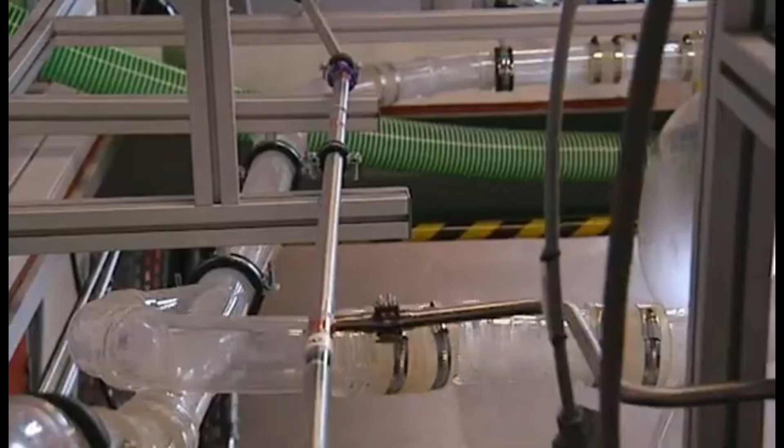This is Formula One technology for toilets. And the result is some seriously speedy sewage. The speed on the piping is around 60 meters per second. That's about 130 miles an hour.

Such high-performance plumbing is needed because of the size of the plane. At nearly 73 meters long, the loos at the front are a very long way from the tanks at the rear. This is the most forward toilet in the A380, the one the pilots normally would use. It is quite difficult because you have a pressure loss from the waste tanks to this toilet because of the length.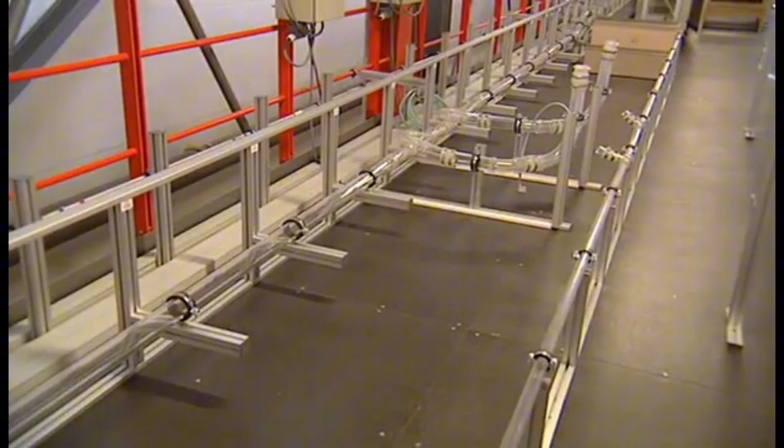It's a challenge not to be sniffed at, but undeterred the guys give it a go. Just seconds later, the waste arrives at the tank, and flushed with success, the engineers bring the A380 another step closer to reality.

By March the 14th, 2005, the A380 is parked outside the factory here in France. The customers for this first plane are technically the test pilots who will fly it. But there's still a lot of work to be done before they will accept the machine.

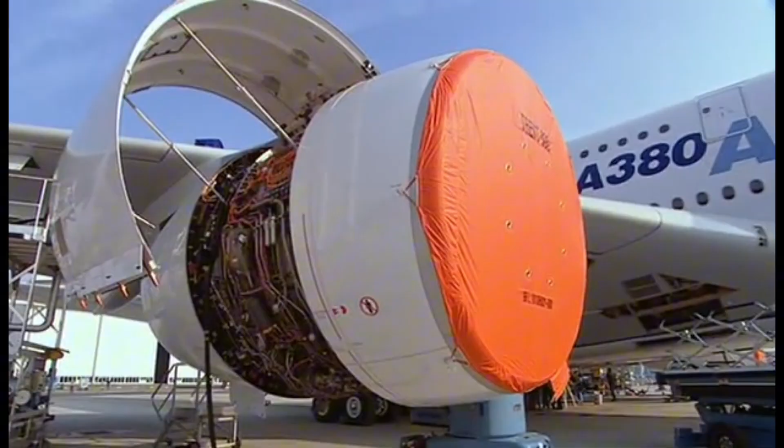Head of the programme, Charles Champion, comes to take another look and discovers it's not all bad news. That's the most important part - the coffee machine for the flight test crew. If this doesn't work, they will never take the aircraft.

Joking aside, it's clear that the plane is far from ready. The landing gear is just one of the things that need to be finished. We still have a lot to do. There is a lot of activity, so some of it is related to troubleshooting and other related to closing the area, but we do have a lot of people still working on the aircraft.

The next day, the test pilots turn up for a photo shoot. The media are naturally interested in the 6 men who will fly the A380 for the first time. Although they pose happily for the cameras, it's clear where their real interest lies, for within minutes of the last shot being taken, they're in the plane checking out the new machine.

For flight test director Fernando Alonso, it's important to feel comfortable at his post. This is the place where I will be sitting for the first flight, and it'll be almost my home for the next months ahead.

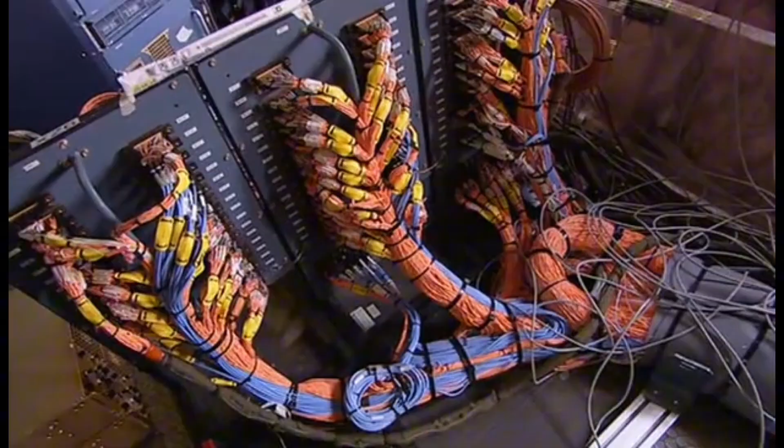The aircraft is equipped with sophisticated flight instrumentation, thousands of sensors that record every aspect of the plane's performance. Gathering this precious data is vital to the test flight program. If on the day of the first flight, the flight instrumentation does not work, we will not fly. So I think that sums it up.

Despite the seriousness of the task ahead, there's no doubt that the A380 is beginning to generate a real buzz. It's really great to be here. We've been waiting for it so long, and now we're almost there.

March the 30th, and the plane is in a hangar again for final tests on the electrics and hydraulics. The moving surfaces are working, but one safety-critical system still remains unproven. Simon Sanders is back for a last-ditch attempt to show the landing gear will deploy properly. His team hope they've come up with a solution to the problem with the sticking wheels.

This is the ramp on the wing gear door where we put the grease last time. Now for a more robust solution, we've applied a layer of Teflon paint, similar to the coating you have on non-stick frying pans. This will reduce the friction when we do the freefall. We're going to now perform the test to demonstrate that with this low friction Teflon coating we've solved the problem.

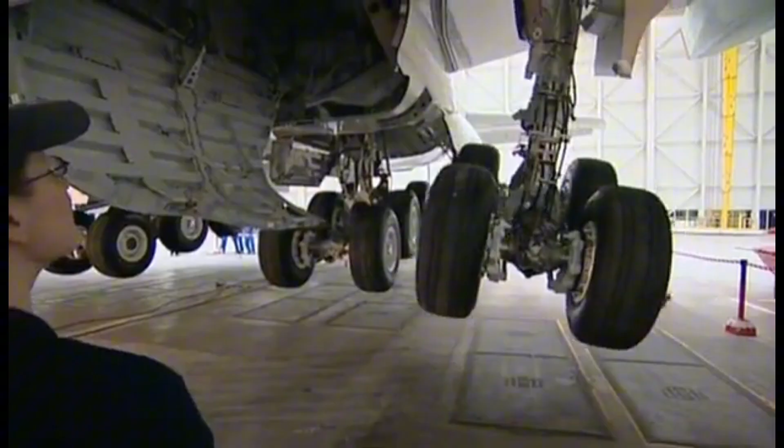As the landing gear is retracted in preparation for the test, everyone is aware they cannot afford to fail. In the cockpit, the system is primed.

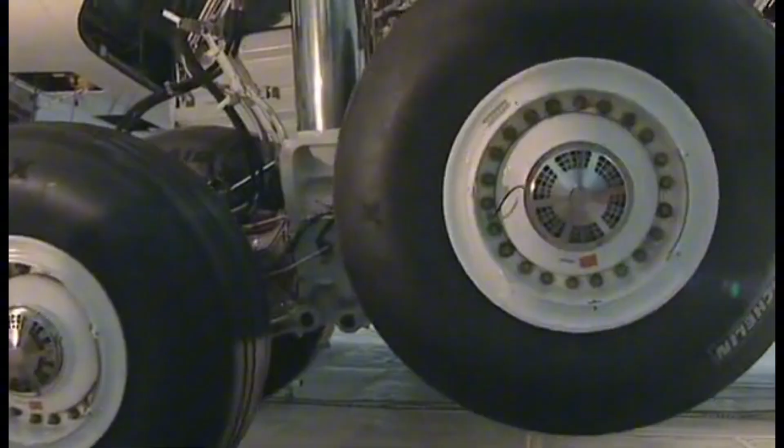The problem persists, but at least the gear slips free sooner than last time. In flight, the airstream will probably shake the gear free sooner still. It's up to Gerard to decide if he's happy to accept the plane with the gear as it is.

It's not marvelous, but it is working, and at least even if the left landing gear is not extended at the same time as the right one, yes, I think I will accept it. The team will continue to refine the system, but at least the plane can now be handed over to the test pilots.

Fernando Alonso is taking the opportunity to look round the plane to check that nothing has been missed in the final push. Like always, at the end, if there's a big rush, we get very excited, but at some point in time you need to take a decision. Okay, now stop. It's over, and we take it over, because otherwise it will just go on forever and ever.

The plane has everything needed for the test to come, including water tanks that will simulate the weight of hundreds of passengers.

But in the rush to get ready, it appears something's been overlooked: the cabin lights are not working. Cabin illumination is switched off, so we have no possibility to switch it on. I need the lights on. We have been having handover meetings for the past two weeks, and nobody ever said that the cabin lighting was not working. Nobody mentioned the limitations. Nothing was said about lighting. So now we put on the breakers. If something burns, it burns.

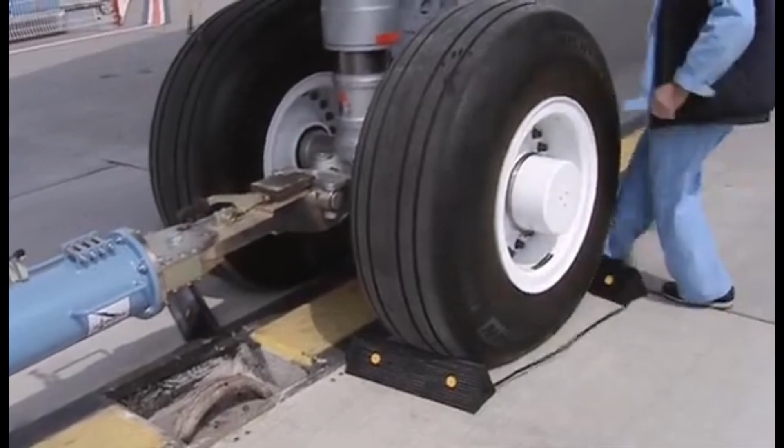Quite a crowd has turned out, and everyone wants to know how long it will be until the plane flies. Previous aircraft have taken about a fortnight, but Alonso won't be pinned down to a specific date just yet. I really do not want to be under the pressure of saying it's ten days or two weeks. I don't know. It'll be when it'll be.

And nobody's keener and more eager to fly than we are. So I think you just have to rely that as soon as we feel the airplane's ready, we will fly.

In their time, these guys have test flown everything from airliners to jet fighters, but this is their biggest challenge. On previous programmes, they have performed takeoffs with runways flooded with tons of water.

They've deliberately scraped the fuselage along the ground during takeoffs, and they've flown aircraft to Siberia to test them at 50 degrees below zero.

Plus, they've thrown passenger planes around the sky in the most extreme manoeuvres. It's a challenging but satisfying job.

It's something which is rather demanding. It asks you to be at your best level permanently, because you cannot cheat. You are really flying in real conditions, and it's something which is stimulating, I would say.

Within the next 12 months, Jacques and his team will be pulling manoeuvres like this in the A380. But all that depends on getting the plane into the air. The first step is to get used to the aircraft, to make sure that they are familiar with all the systems and that everything is working.

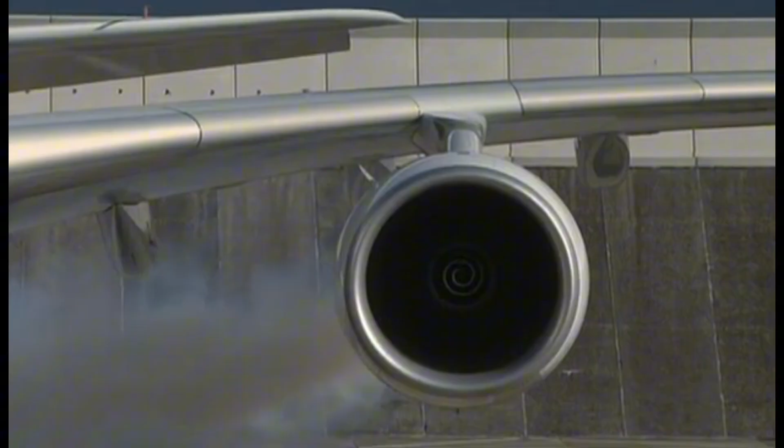The smoke is caused by a protective layer of oil burning off as the engines are run one by one.

Testing and monitoring the engines takes 2 long days, but now the aircraft can move under its own power for the first time.

The next 10 days are spent on further detailed checks on the ground, and the A380 becomes a familiar sight at Toulouse International Airport, taxiing up and down.

Gradually, the speed is increased, and most importantly, the brakes are tested. By the look of the tyres after the tests, the brakes are well up to the job.

Confidence in the aircraft is growing every day. There's still some little things to be fixed, but we're getting closer. Every day we're closer.

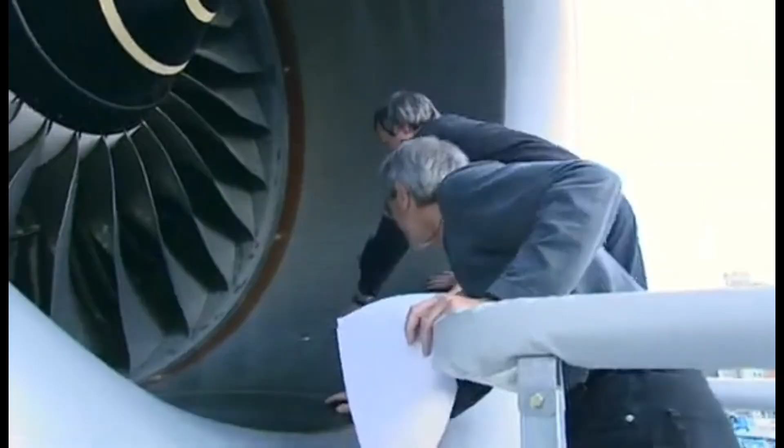If that's the bird shit, where did the bird go? He was scared. He was really scared.

2 days later comes a stark reminder of the dangers facing the test team.

Jim Fawcett has to make sure they are familiar with all the safety kit on board, including an emergency escape chute should the unthinkable happen.

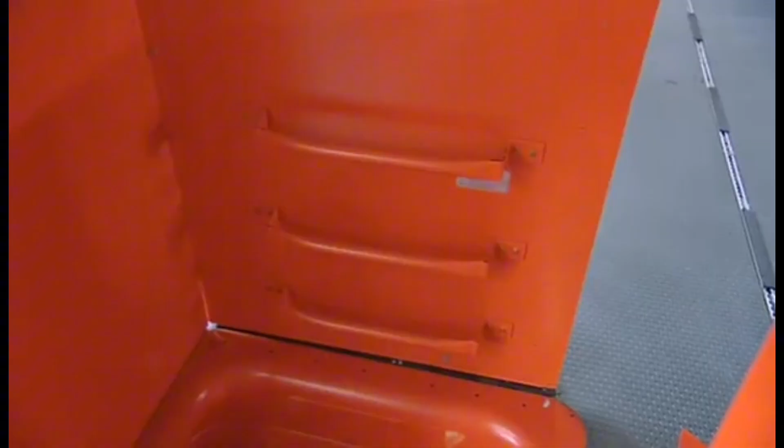So, we have an emergency evacuation system. This is fired by pyrotechnic handles in the cockpit and in the flight test engineer's station. They drive a firing door which is down the bottom of this tube here in the main cargo door. The crew can come and jump safely out through this door and with the aid of a parachute get down safely to the ground.

After 2 weeks of hard work, there's one final test. The engines are brought to full power for the first time.

Accelerating hard, the plane reaches 130 knots, almost 150 miles an hour.

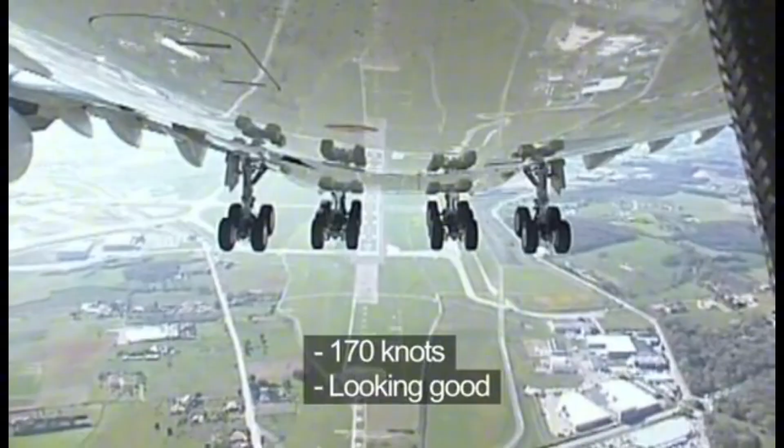The next few hours will be spent gently probing the aircraft's abilities. And 15 minutes in, it's time to retract the landing gear.